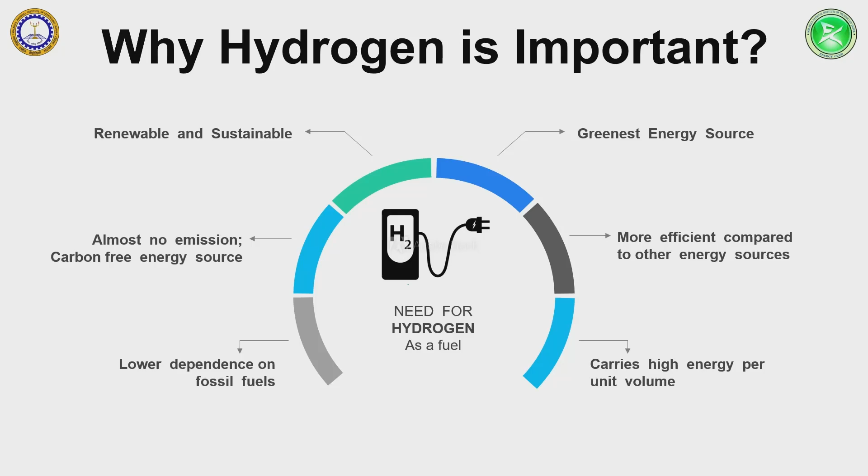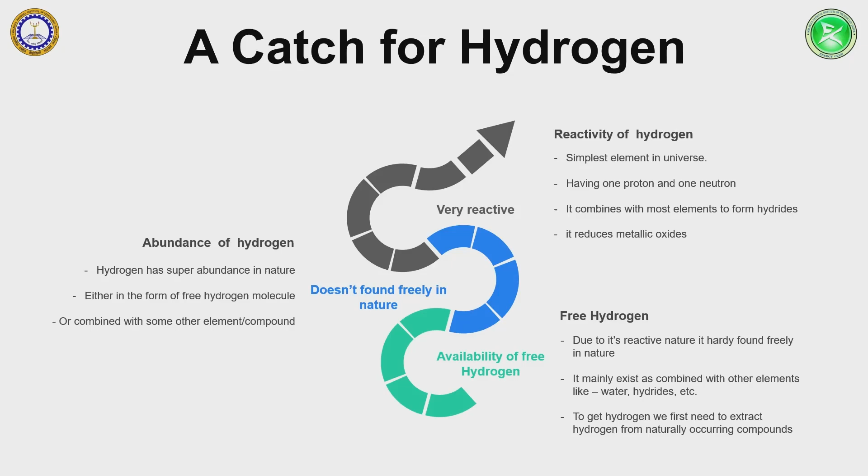Here are some characteristics related to hydrogen: it is very reactive, so it isn't found freely in nature. It mainly exists combined with other elements, for example, water. To get hydrogen, we first need to extract hydrogen from naturally occurring compounds like water. Now comes extraction of hydrogen. Hydrogen can be produced from diverse domestic resources including fossil fuels, biomass, and water electrolysis with electricity. The environmental impact and energy efficiency of hydrogen depends on how it is produced.

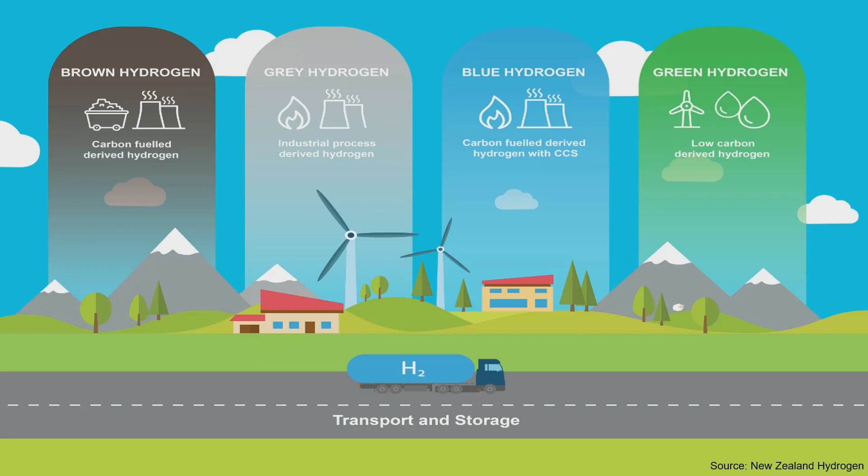Hydrogen producers, marketers, government agencies, and other organizations might categorize or define hydrogen according to the energy resources for its production. For example, hydrogen produced from coal may be called brown hydrogen, and hydrogen produced from natural gas or petroleum might be referred to as grey hydrogen. Brown or grey hydrogen production combined with carbon capture and storage might be referred to as blue hydrogen. Green hydrogen is hydrogen that is produced exclusively from renewable power.

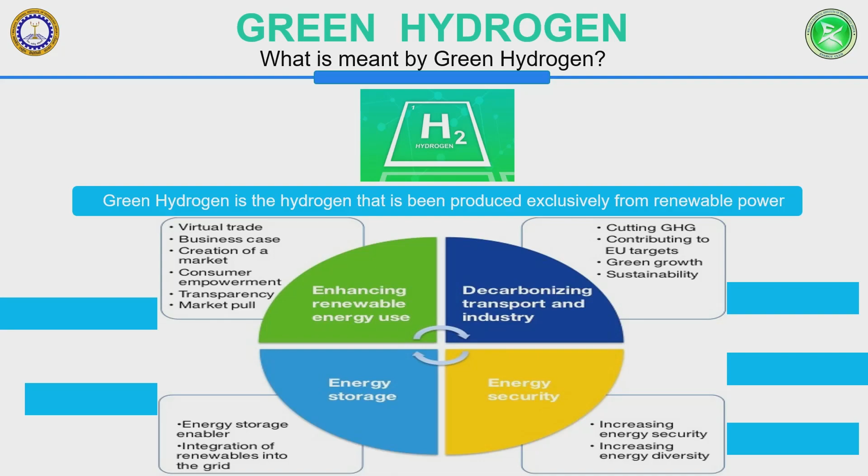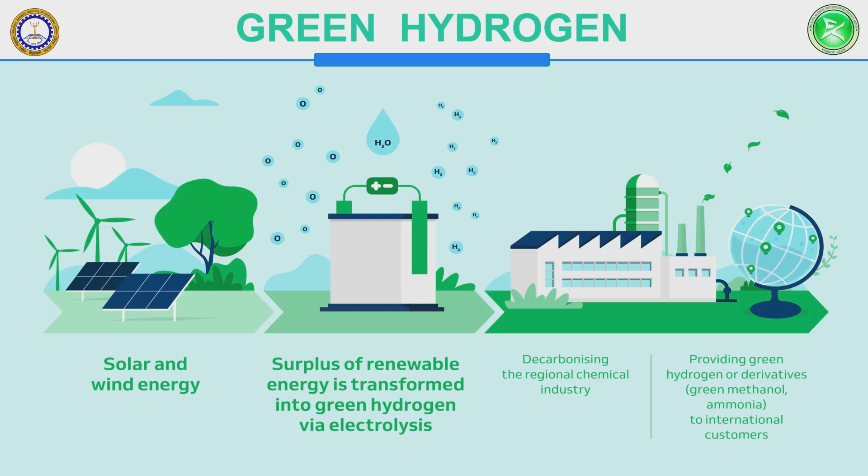The term green hydrogen is introduced, but producing it is very expensive, although costs are coming down as new technologies come into the picture. But a number of other challenges remain, including lack of infrastructure, transport, and the fuel cells which convert hydrogen to usable energy for cars are still very expensive. Solutions are coming, investments are made in new technologies.

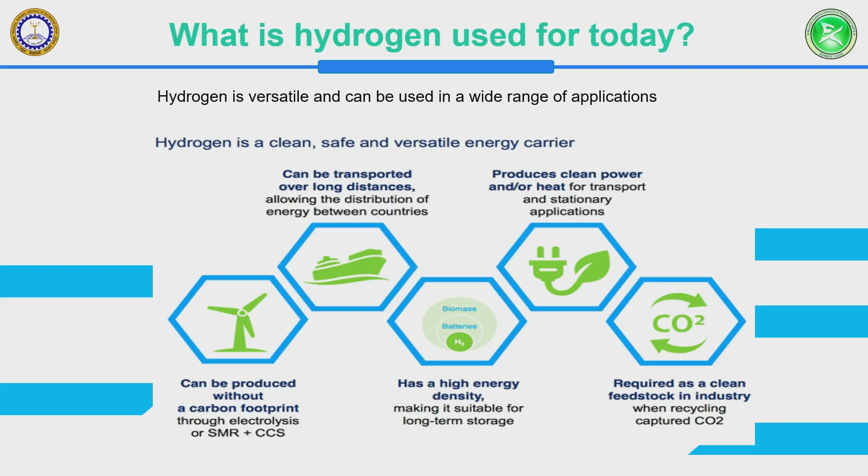Nowadays, hydrogen is used in several industrial processes. Among other applications, it is important to point out its use as a raw material in the chemical industry and also as a reducing agent in the metallurgic industry. Hydrogen is the fundamental building block for the manufacture of ammonia and hence fertilizers, and the methanol used in manufacture of many polymers. Refineries, where hydrogen is used for the processing of intermediate oil products, are another area of use.

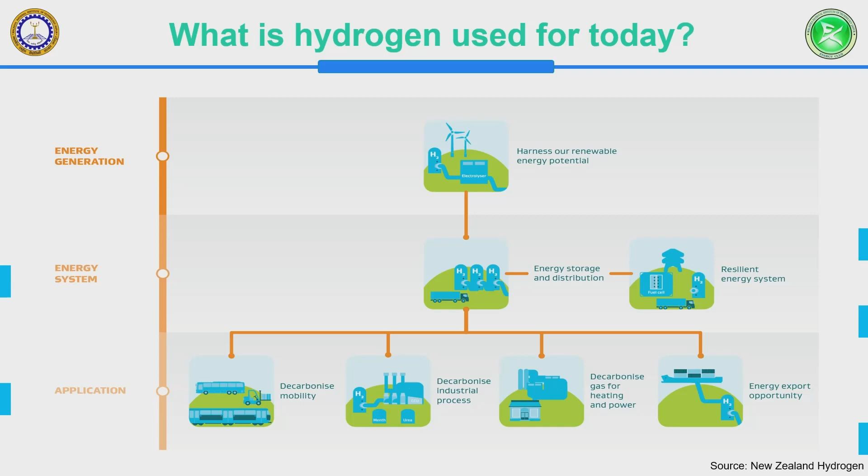Hydrogen fuel is considered a good candidate to contribute to the decarbonization of the road transport sector if it is produced from renewable energy sources through the process of electrolysis. It is used as domestic energy; if in addition to the generated electricity the heat produced is also used, the process is referred to as combined heat and power (CHP). The first industry hydrogen has potential of reforming is transportation, where hydrogen can act as a direct replacement of oil and diesel and hold some advantages over electric vehicles.

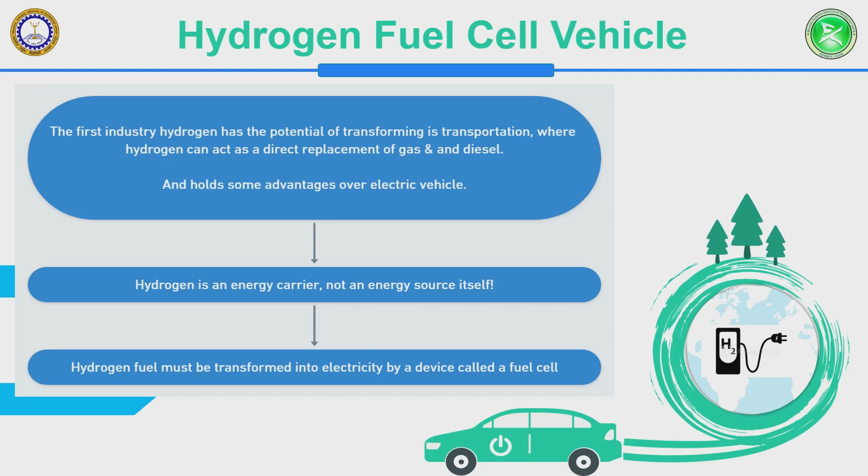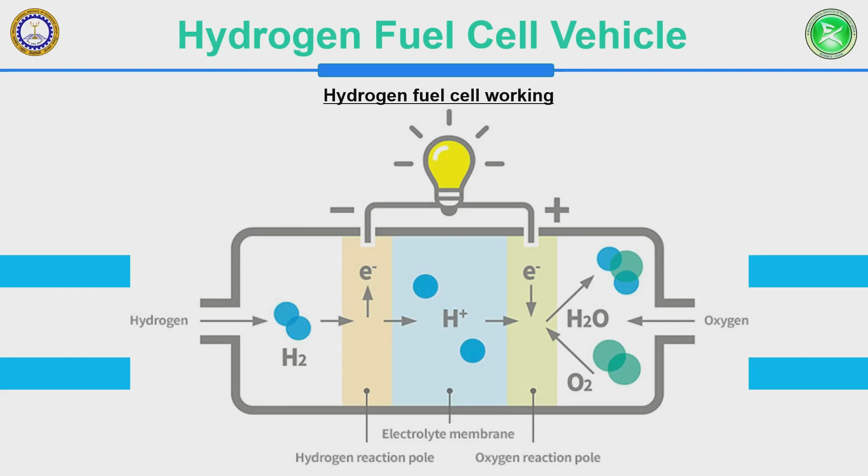Hydrogen is an energy carrier. It is not an energy source itself. Hydrogen fuel must be transformed into electricity by a device called a fuel cell stack. Let's see how a hydrogen fuel cell works. Hydrogen drawn from an onboard pressurized tank reacts with a catalyst made of platinum. As the hydrogen passes through the catalyst, it is stripped of electrons, which are forced to move along the external circuit and consequently produce an electric current.

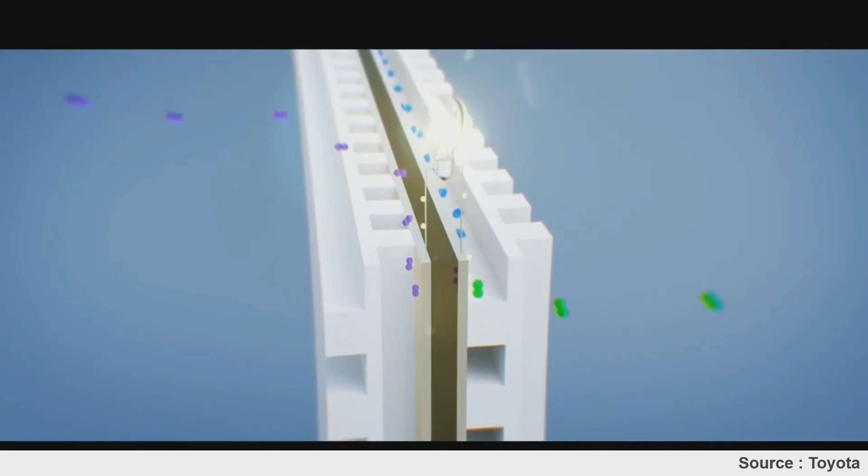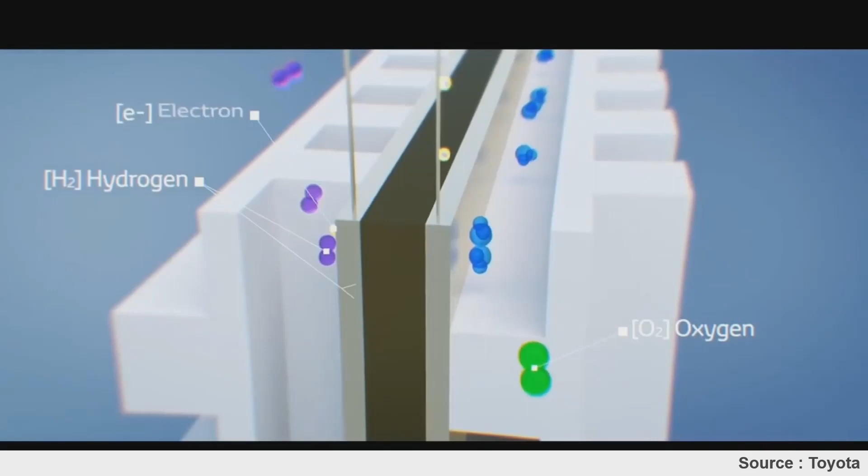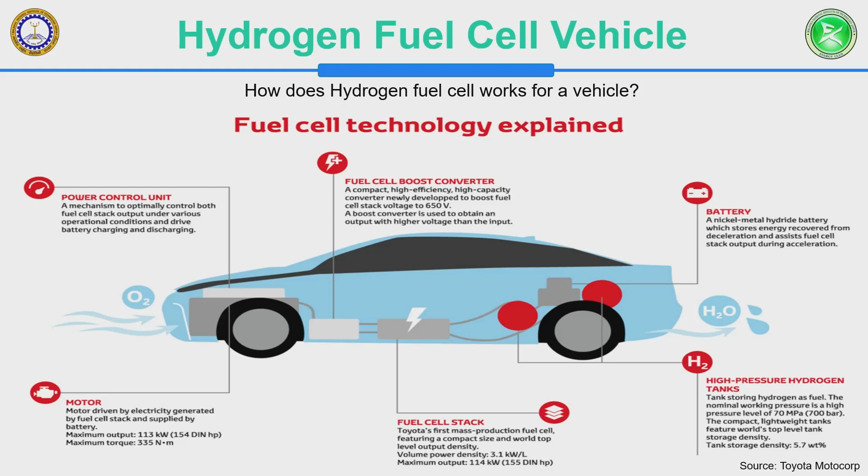So, how does a hydrogen fuel cell work for a vehicle? The electric current generated from the fuel cell stack is then used by the electric motor to power the car, and leaves water vapor as the only byproduct. No doubt it gives zero carbon footprint. Here is a short video.

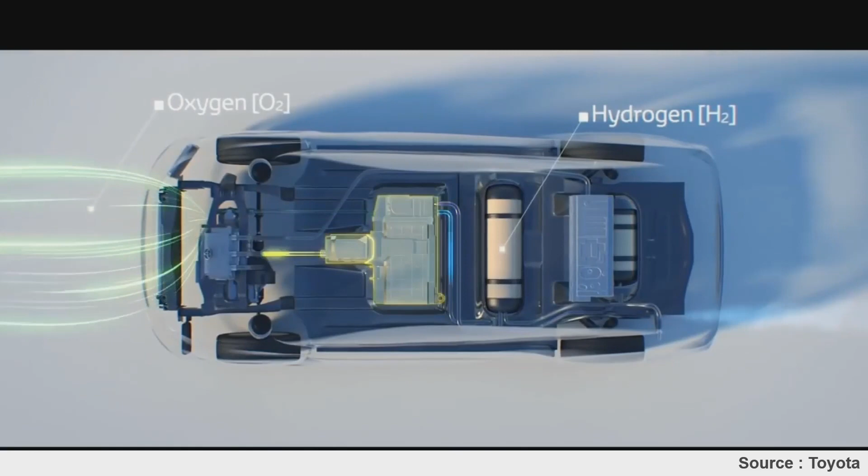Comparing hydrogen fuel cell vehicles with electric vehicles. Fuel cell vehicles have much faster refueling time, about 5 minutes, as compared to battery vehicles, which take about 45 minutes. Fuel cell vehicles have 5 times better energy storage per unit volume and weight. This frees up more room in the automobile for other things like passenger space and storage space. Fuel cell vehicles allow us to go farther compared to electric vehicles, as they can extend to heavy long haul trucking, shipping, and the aviation industry also.

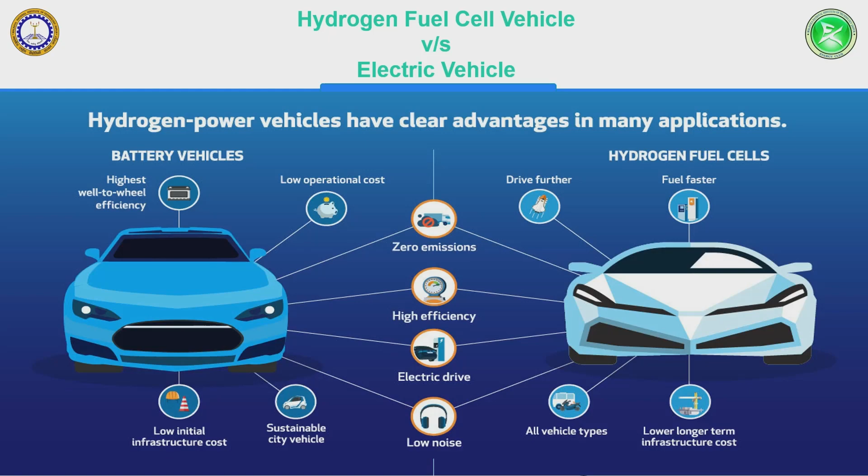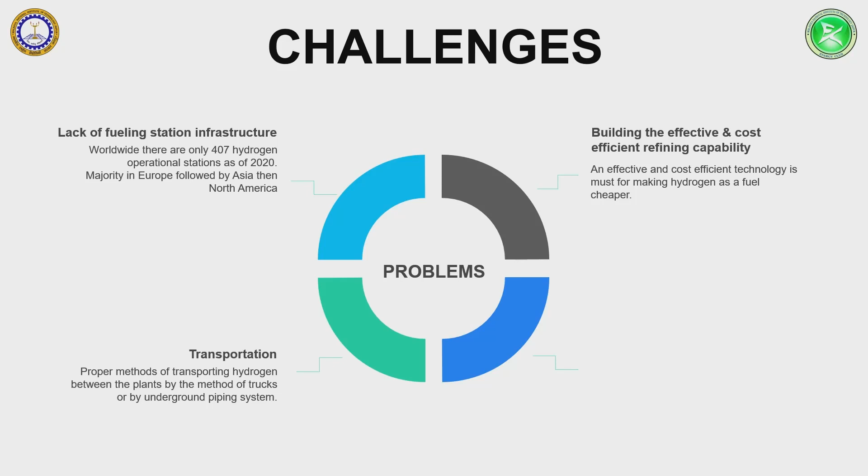But there are some challenges which we need to overcome in future to make hydrogen the fuel of the future. Lack of fueling station infrastructure: worldwide, there are only 407 operational hydrogen stations as of 2020, the majority in Europe, followed by Asia and then North America. Building effective and cost efficient refining capability: an effective and cost efficient technology is a must for making hydrogen as a fuel cheaper. Proper methods of transporting hydrogen between plants, by trucks or by underground piping systems.

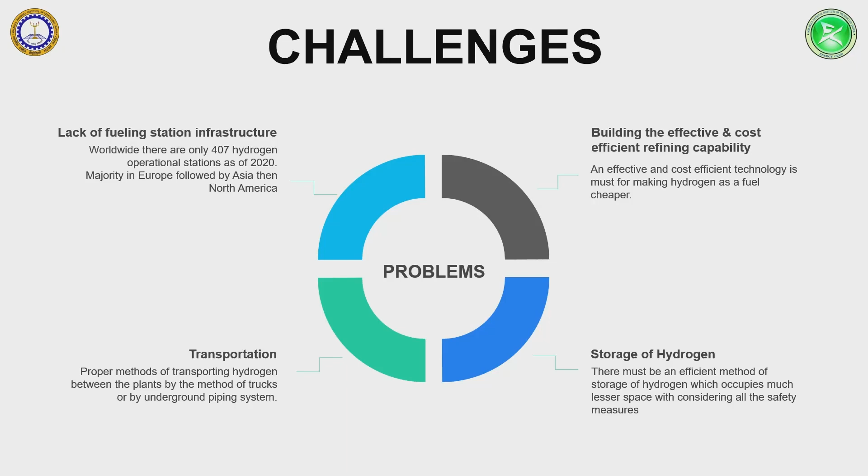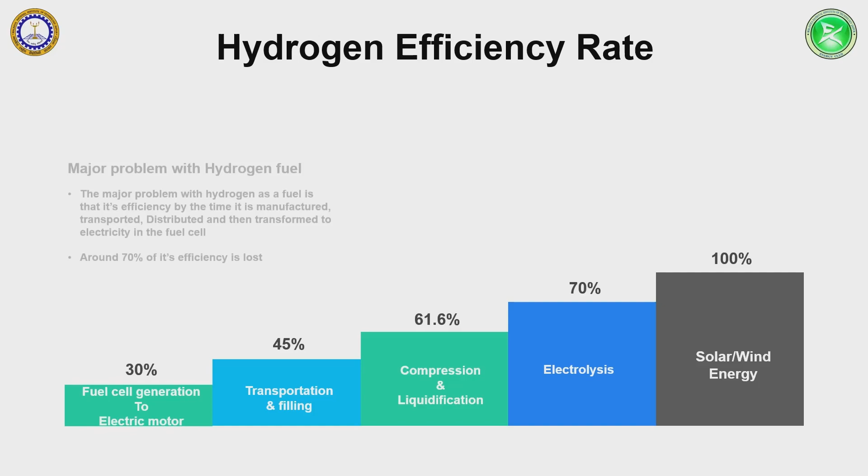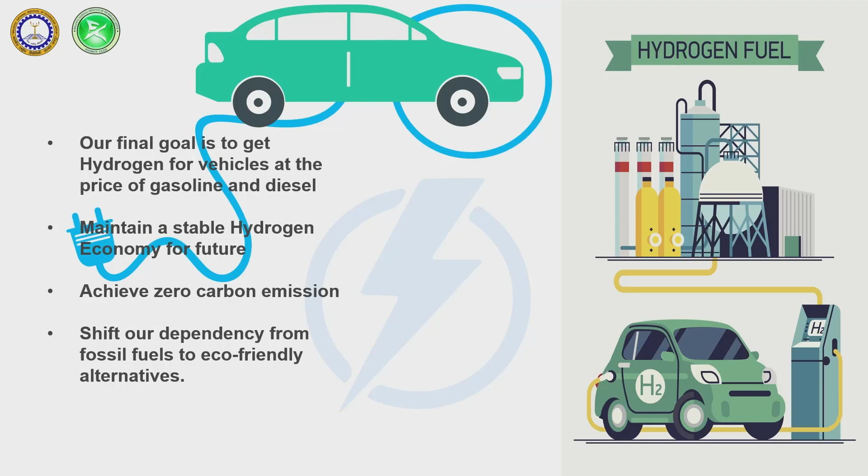Storage of hydrogen: there must be an efficient method of storage of hydrogen which occupies much less space while considering all the safety measures. The major problem with hydrogen as a fuel is its efficiency. By the time it is manufactured, transported, distributed, and then transformed to electricity in the fuel cell, around 70% of its efficiency is lost. Our final goal is to get hydrogen for vehicles at the price of gasoline and diesel, maintain a stable hydrogen economy for the future, achieve zero carbon emission, and shift our dependency from fossil fuels to eco-friendly alternatives. Thank you.